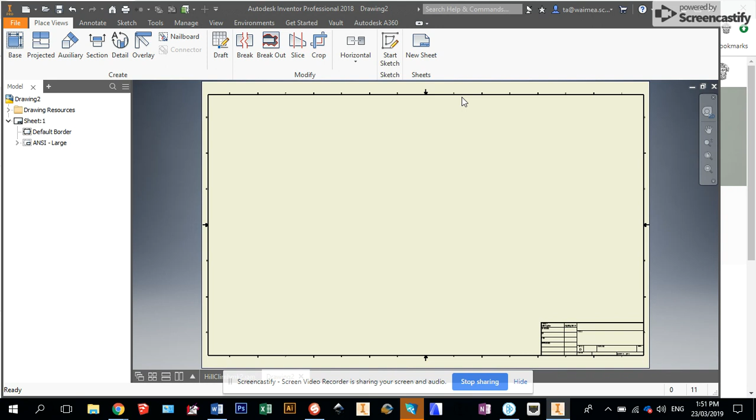So the first thing you'll do is here you'll go to Sheet 1, right-click, and you will go down to Edit Sheet, and we'll change from size D to a size A3, and then OK. And as you can see, it's already got a standard border. You could leave that border in place if you like, or you might choose to delete it and create something yourself.

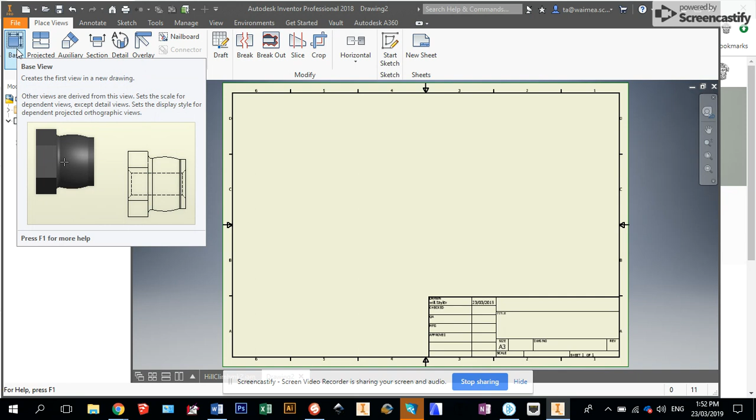So the next thing we'll do is we're ready to place our views. So we'll click on here and go Base, which creates our first view in our new drawing. And funnily enough, it's defaulted to the last thing. You may have to browse to find this. I'd also like you to look at the scales here. So this has come up as a scale of 1 to 4, which is not a standard engineering scale. You want to look at what's going to fit best on your page.

So the ones you want to go for in New Zealand are 1 to 1, 1 to 2, 1 to 5, or any number of zeros after those. So that would be 10, 20, 50. So I think looking at the size here where we're defaulting to, I'd say we're probably going to try and see if we can fit a drawing of 1 to 2. And it doesn't give us an option, so we'll just type it in. And go OK.

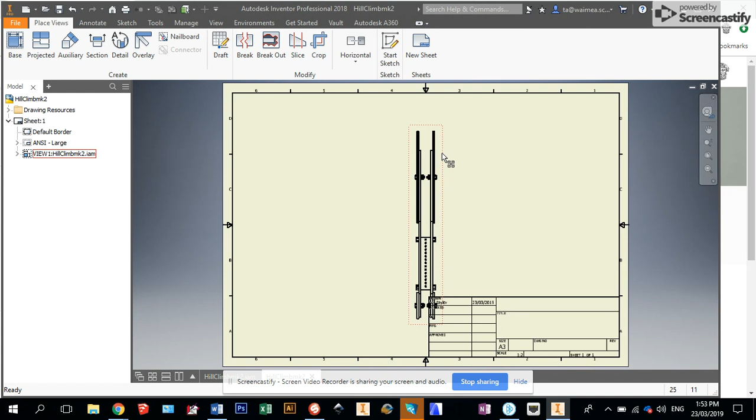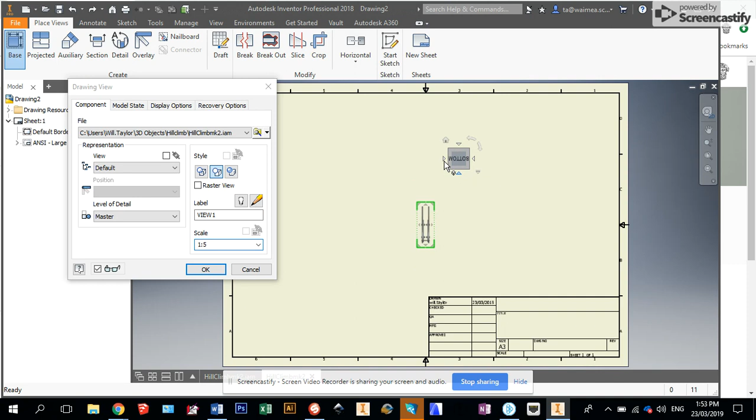Now, obviously, it's not quite the right way we want this to work. So we'll undo that. And 1 to 2 is probably too big. So we'll go to our next size, which we can do as a standard size, which is going to be 1 to 5. Also in here, we're going to rotate this around because we want to have this side view first. So we can do this, and this, and that will kind of work for us.

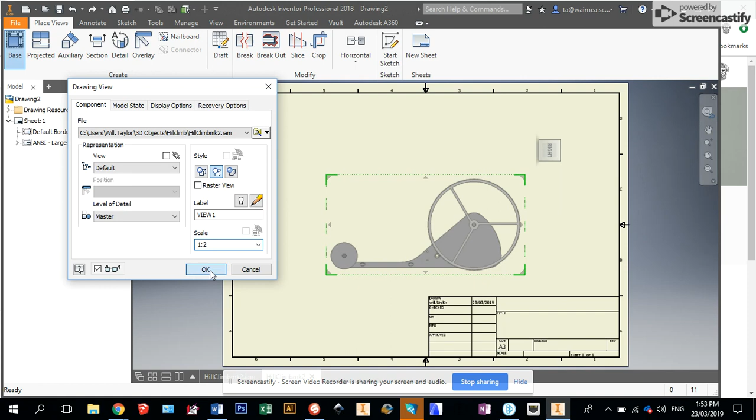Okay, we can just double check that 1 to 2 isn't going to work. Might almost get away with it. We'll see if we can fit it on the page and see where we go from there. We can also always edit it later. We'll go OK, and it creates a base view. Now I can drag this. Just click on here and drag it. Oh, look at that. It's going to just fit between our title block.

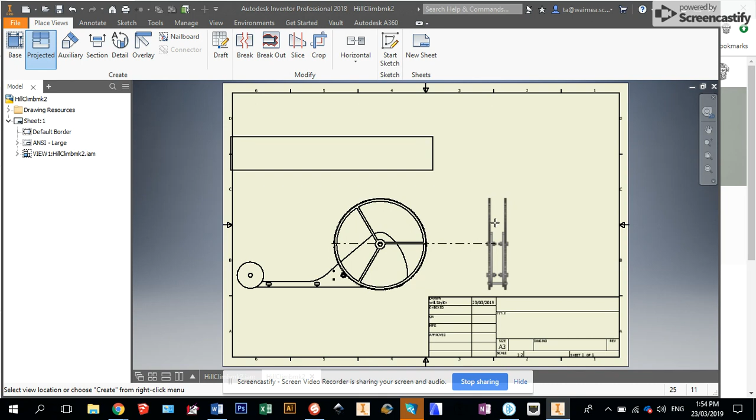Yep. So next we want to do our projected views. So we'll have to drag this up. Projected views, and then from here you're going to drag it up. So this is what our model will look like from the top. And this way here, which is what it's going to look like from the right-hand side. And we also have this one here, which is what it's going to look like from a three-dimensional view. And once we've done this, we can go create. And then it's automatically generated our overall views.

Now, what would be a nice thing to include on this drawing is also a parts list as well, just because this is our assembled view of our whole drawing. So if we look our way through, we go Annotate, and we can see we have Parts List here. So it says creates a parts list and places it on the drawing. We click on this. Before we start, we're going to select our view. So we'll select that view, then go OK. So assembly. Cool. I wonder if it'll fit down here.

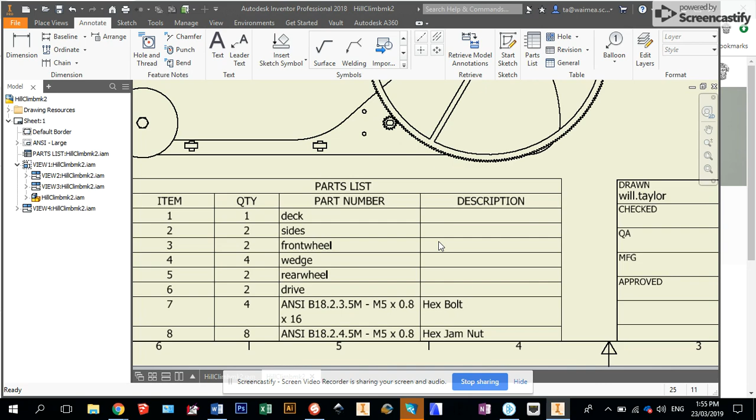And we can see in here, it's gone and listed the deck, the side, front wheel, wedge, rear wheel, and drive, using the standard parts that those are saved at. It also tells us how many of those there are. So obviously you can see there's 4 bolts and 8 nuts. You could also include a description here, which in our case would be all using 4mm MDF. Obviously you want to modify the title of your drawing, but yeah, that gives us a really good start of what we want to do.

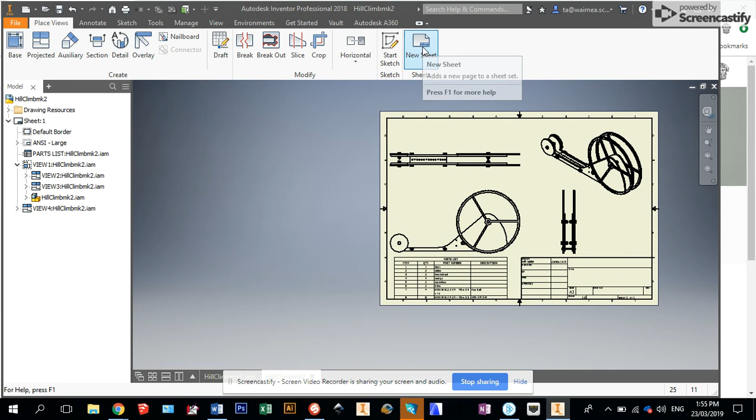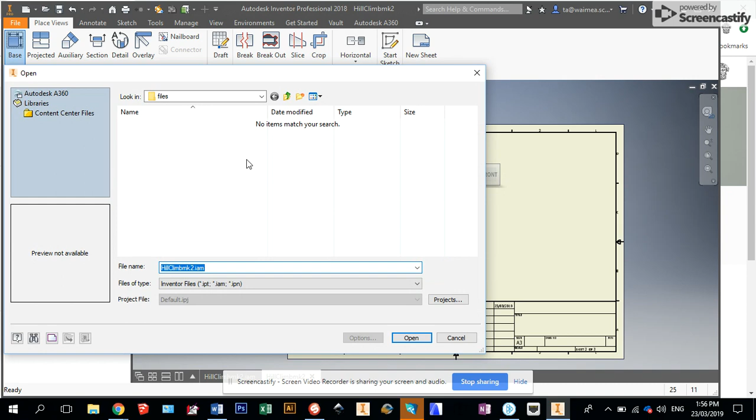The other thing you'll need to do for the assessment is you'll need to create a drawing that shows the individual parts. So if we go back to here to Place Views, we want to create a new sheet. So we'll go New Sheet. And this here is going to have all of our parts that are in here. So you can also see down here it says sheet 2 of 2. So we're going to Base, and we're going to go back here and browse. If we click on this, 3D objects. Hopefully you've saved yours in a nice organized way.

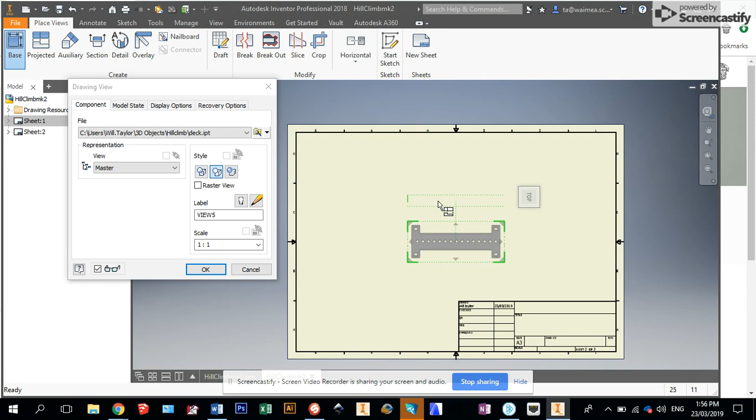And to be honest, I'd probably start this the same way as I did my assembly file, which will start with the deck. Open. Obviously it doesn't show much from this angle or that angle. But if I have it from here, this shows the thing we actually want to show. So I can just basically click. And okay. Now I can drag this around. On these parts files here, we're going to want to have some dimensions, preferably enough dimensions so someone would be able to go away, take your set of drawings, and create their own copy of it.

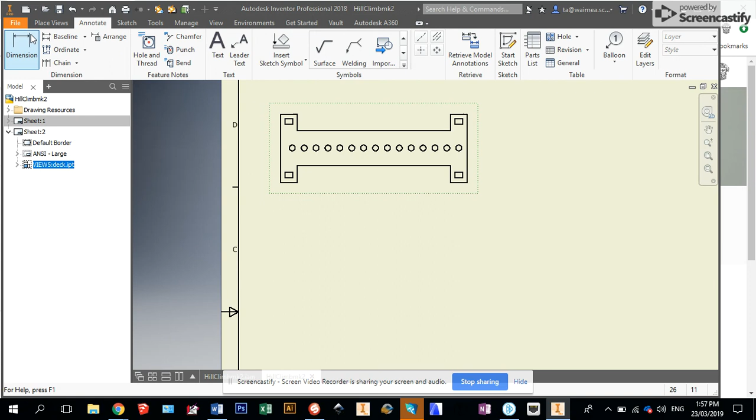So the only other tool I really want to show you in here is our Annotate tool. This makes our dimensioning really easy. So we click on Dimension, and you'll come down here, our height. And you can see it automatically spaces off our dimensions really nicely. We might also want to include this dimension, additional. Let's say 3.5. That'll be okay.

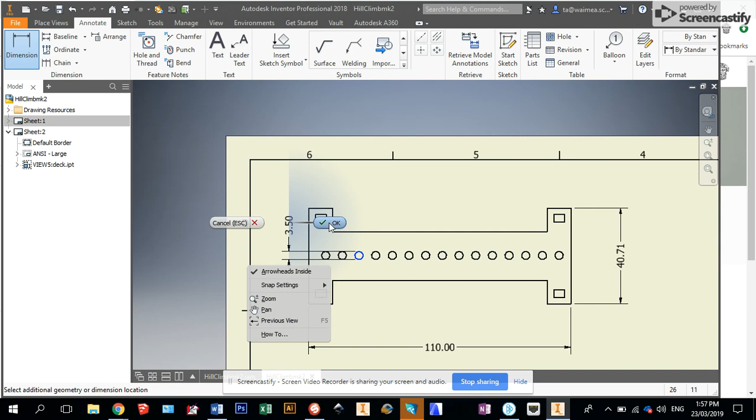And basically, yeah, as long as you've dimensioned enough, you've included all the parts that are going to be included in your drawing. That's all you really need to have for the assessment. You'll need to also include an annotation saying all of these parts are made of MDF. In your title block, you'll need to include your name, the date, and also the scale of the drawing. But that's really pretty much what you need to get that unit standard done.